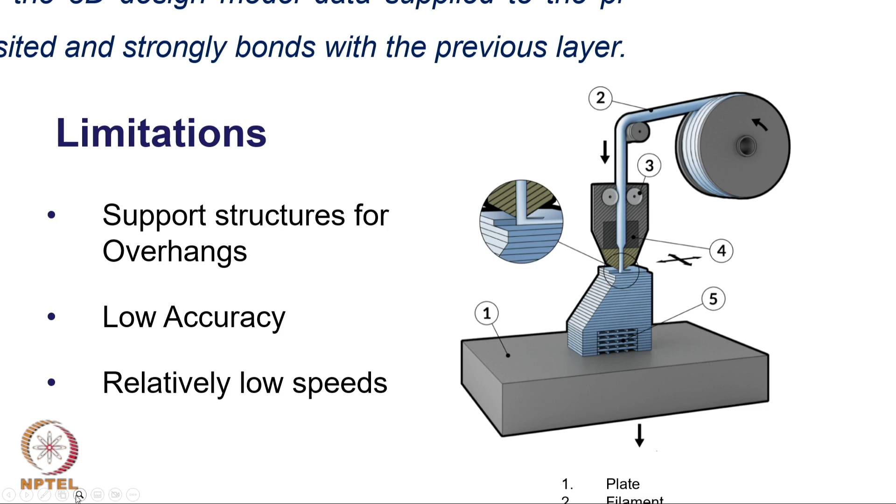The entire grey thing you see, along with a bit of green, is called the extruder or nozzle. The filament comes from the spool past the rollers, and what you see here is the heating element. When the filament passes through this heated element, it melts, and the melted material is then deposited in 2D layers like you see here.

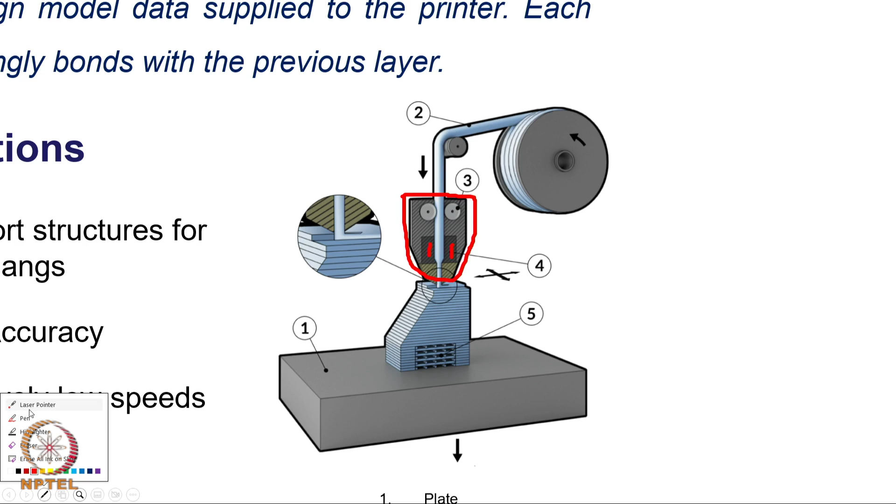In FFF technology also, you have to remember that support structures are required, just like in other processes. There is one variation possible in FFF: if you are printing a part, you can try to make the inside hollow with a certain infill - that is also possible.

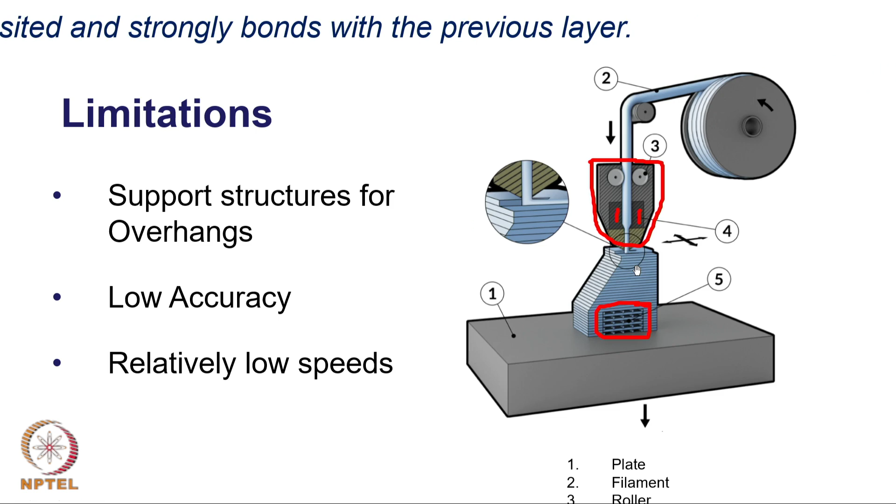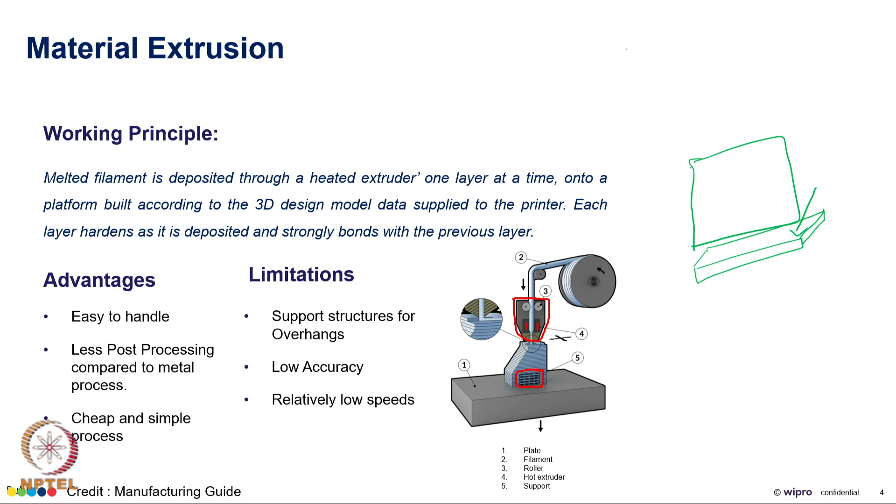For example, let me choose another color. Let's say this is the region I want to melt - this is the top view. When I see it from the front, it is a layer like this, and in isometric, this is how it will look. If I look from the top, I see a rectangle - this is the region where I want to deposit material. Now I have the option here to deposit material, let me use another color.

Give me a second, I do not think that is a good color.

So, I have the option to go from one end to another very close to each other and deposit material, making the entire thing completely solid because the lines are very close together. But if I want to save material and make the process faster, I can deposit the material with some gap in between, like this.

This region is called infill. In material extrusion, we have the option of keeping the part hollow on the inside. Infill percentage can be 30%, 10%, 80%, depending on what we want to achieve, so the infill can be hollow. However, the boundary of the part has to be completely solid. There is no compromise on the boundary being solid, only the inside can be hollow, and this is called infill.

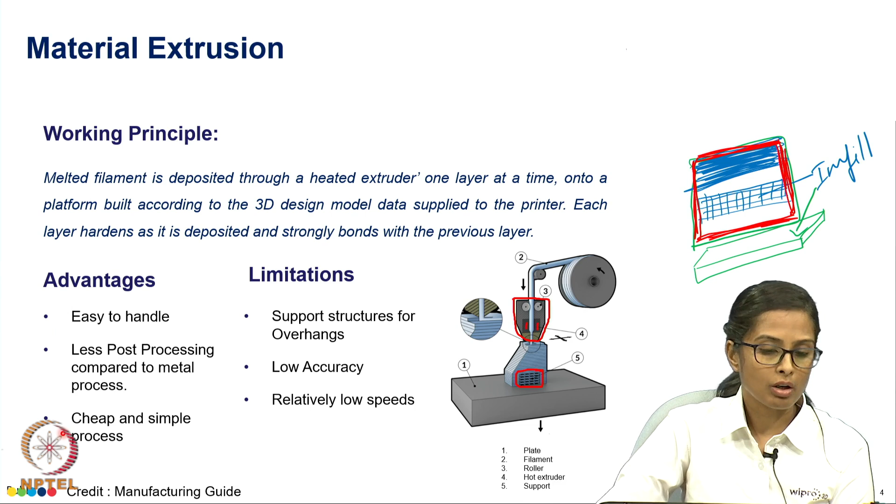This is a technology which is extremely easy to handle. It is also a very cheap and simple process. It is possible to procure these printers easily from the market at quite a low cost, and it is very simple and easy to handle. With very few directions you can start to use this particular printer.

Another advantage is that a lot of different materials can be processed using this technology. Polymers, of course, like thermoplastics, can be very easily processed, and you have different kinds like very high performance polymers like PEEK, PEKK, and ABS, which is a very hard and strong material. All of these can be processed using FFF technology. It is also possible to process a flexible material called TPU. So, the range of materials available is already high.

These days, if you are able to make a metal filament along with some binders, then even metal can be processed using this technology. However, we should remember that after the printing process, we will have to do debinding and sintering processes to get the final part, so there are some extra steps involved.

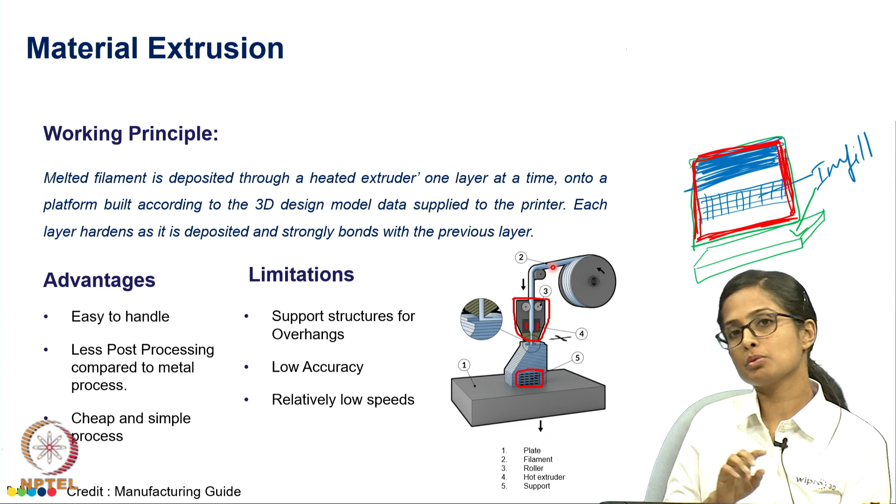FFF technology is one of the most popular technologies. You will usually see a lot of hobbyists who have this even at their homes. There are certain limitations: support structure is always a disadvantage in 3D printing, and in this process also. Low accuracy, as compared to the SLA process. Relatively low speed compared to, let's say, a DLP process. These are only relative to each other. The reason this process is not as accurate as SLA is because the layer thicknesses are higher than what we use there.

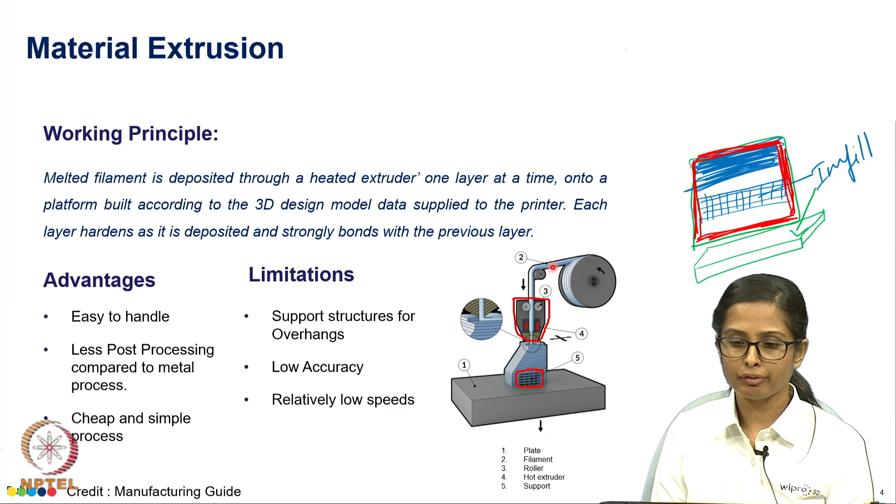I hope the working of FFF technology or material extrusion is clear from this slide. Now we will move on to discuss the different materials, which I already started to brief you on. What is listed here are some of the most used materials, but it is possible to 3D print metal, ceramic, and composites also with this technology, though slight extra processes will be involved.

Stratasys, mentioned here, actually had a patent on this technology till about 10-12 years back, and they call this technology FDM, fused deposition modeling. So it was patented by them and it is a trademark name for them. Many of you may know this technology as FDM, but probably the correct term to use for this is FFF or material extrusion.

Now the patents have expired and a lot of companies are making machines based on this technology, and Wipro also does the same.

The variety of materials processed on this machine also make it suitable for different applications. Robotic grippers are one such application, and we can use pneumatic grippers and things like that made from material extrusion.

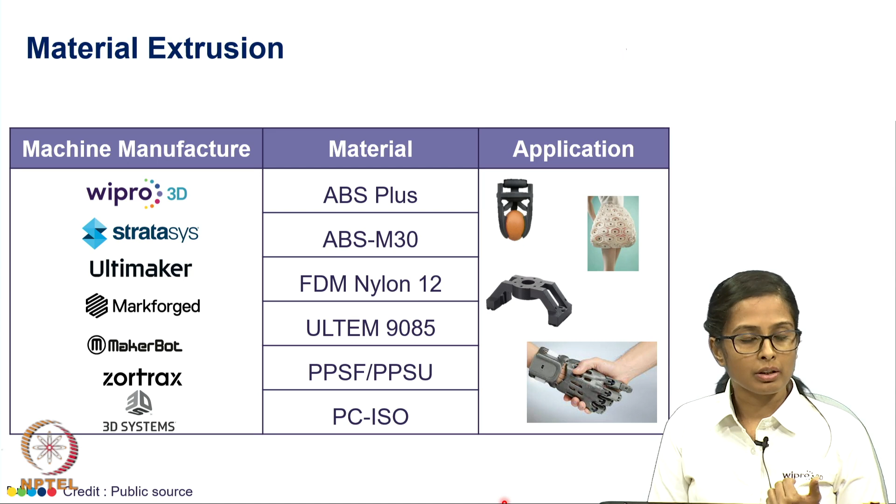I think imagination is the limit - if you think of anything, you can do it. Let us say at home you are a hobbyist and the washing machine knob is broken or something like that - you can 3D print it if you are able to design it. So the applications of FFF technology are really very, very high.

The next technology we will discuss is material jetting. When we come to material jetting, it is very similar, I would say, to our color printing, and let me explain how that works using this diagram.

We have a plate again to start with, that is a given every single time, and then we have the raw material in liquid form here - probably a polymer resin. In this case you can have two different materials: one support material and one actual part material.

This reminds me to also tell you that even in FFF technology, which we just finished discussing, the material was coming out of one nozzle, but in the machine you can put 2, 3, 4, 6, however many nozzles you want, and simultaneously print with different materials.

So maybe you are all printing with ABS only, but you can have a green color ABS, an orange color ABS material, and you can print with them. So it is possible there, it is possible here also. Instead of having two containers, you could have more than two containers over here, and hence the colors or the mixing that you can get becomes even more varied.

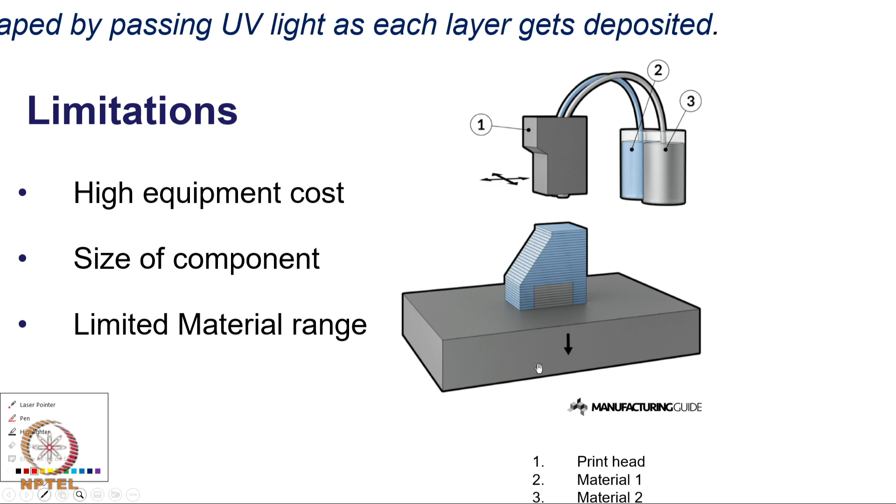So this liquid polymer over here will come through this print head. We call this the print head, just like we have in our paper printing machine, and the material is then jetted out, sprayed in a way only where it is required. So you will have very fine nozzles and material will be jetted out only where it is required. So here you could have the support material, in this technology also supports are required, and the support material can be different and the part material can be different.

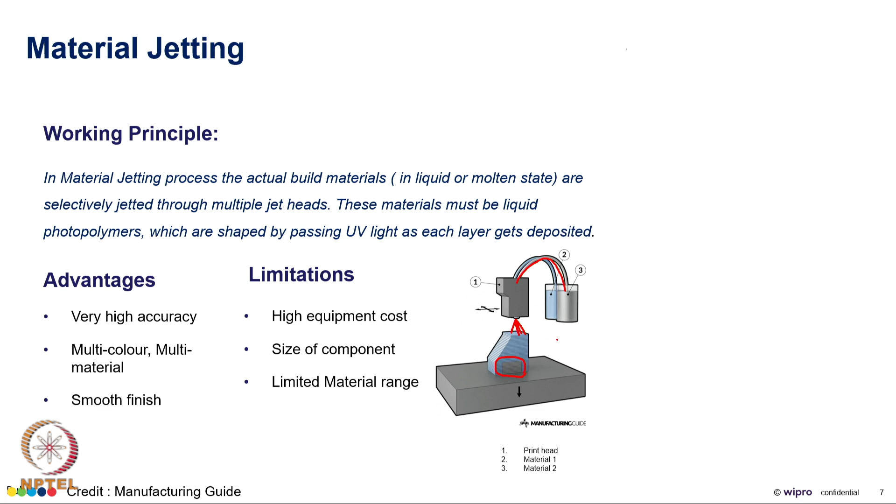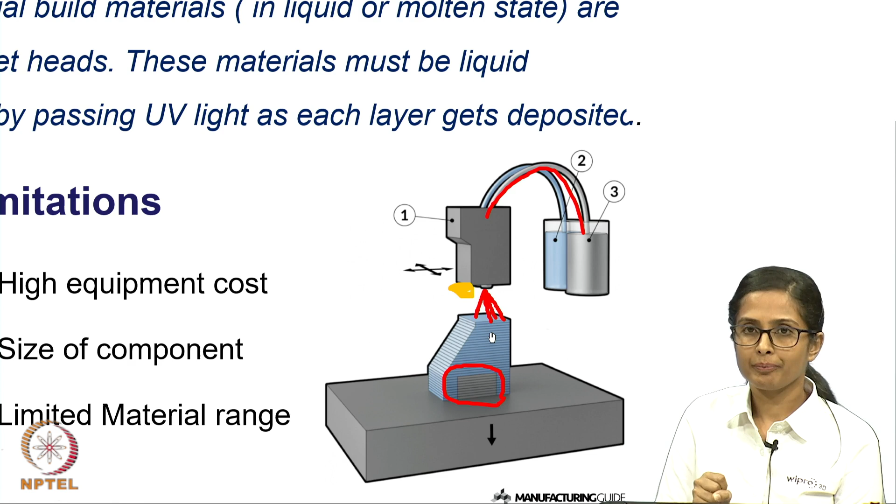Now, once the spraying is over, there is another step which needs to be done, and that would be the curing. So once the spraying is over, in the same print head it is possible to have a UV light source, and this light source will help us cure the resin which has been sprayed. So this orange color blob that I wrote, consider that as a UV light source or some light source which will cure the polymer once it is sprayed, hence the shape stays, because it has gotten cured.

So this is MJ technology, material jetting. It is also sometimes called MJT, material jetting technology. Just add a T for technology there. So that is another acronym and its expansion for you.

What are the advantages? Even here you get extremely accurate and smooth finish parts, but owing to these different containers that we have, it is possible to have multi material and multi color prints.

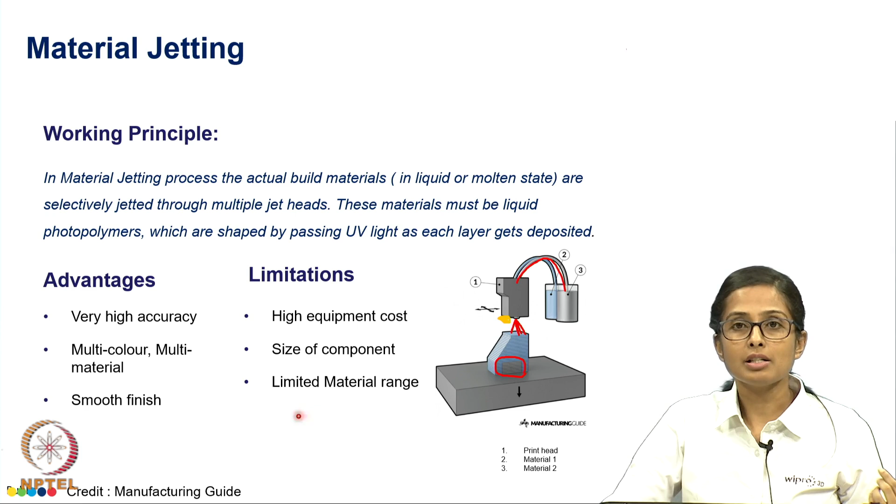However, the limitations are that the machine, the printer itself could be quite expensive. You can't make very large parts like in FFF probably, and you are limited to only those materials which are curable by that particular light wavelength and all that. Multicolor however is definitely possible.

The applications, you can make very good prototypes using this particular technology, and colorful prototypes with texture, finish, however you want. Stratasys also makes this machine, they call it polyjet technology, exactly the same working principle but a different name. So you could have different names for the same technology, and you can have like wood finish, leather finish on the part, using different materials.

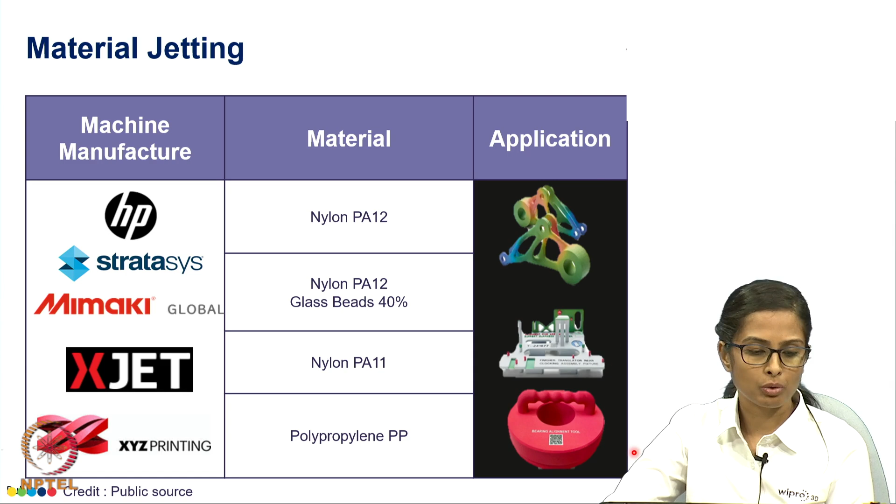Right now not many people use this as end use parts, but it is a great fit for colorful prototypes.

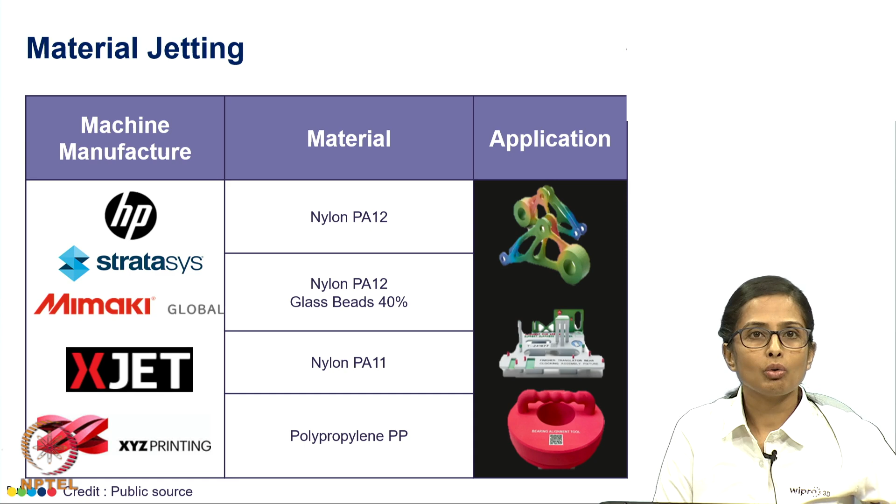Now, quickly let me move on to the binder jetting process, and this process is a little bit more complicated to understand. So I will get started with it right away and hope that I will be able to convey how the process works to you very well.

Now in this particular process, we work with powder as the raw material. The powder could be a polymer, it could be sand - yes, sand can be 3D printed as well - could be ceramic, could be metal. So material can be anything, but it should be in the powder form.

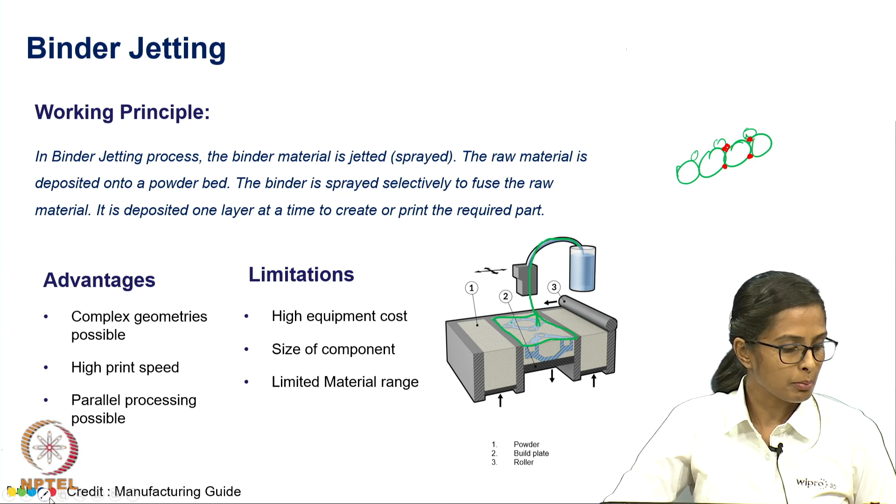So the first step over here is 3D printing it. The second step is the de-powdering.

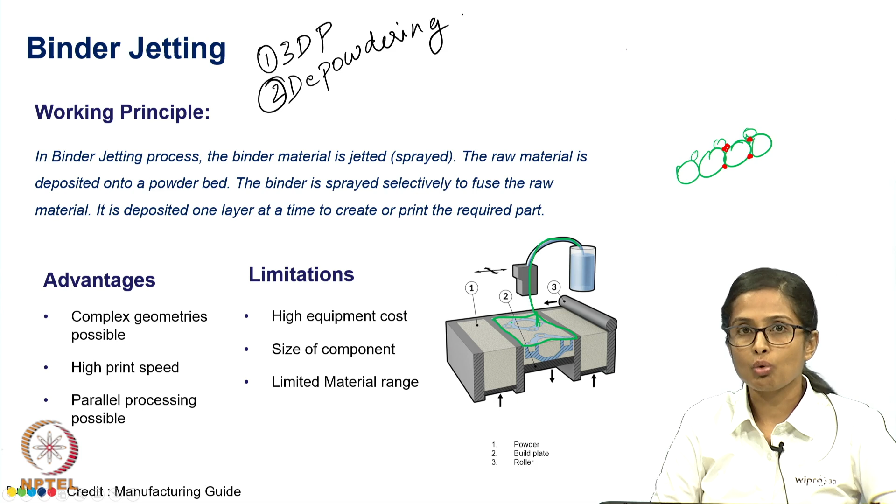Once the de-powdering is over, then we do something called de-binding. Whatever binder has been sprayed needs to be removed. Now every company which makes a machine will also give its proprietary binder.

In the de-binding step, all of the red binder that was there will evaporate, and from the green part, this part is going to become what is called a brown part.

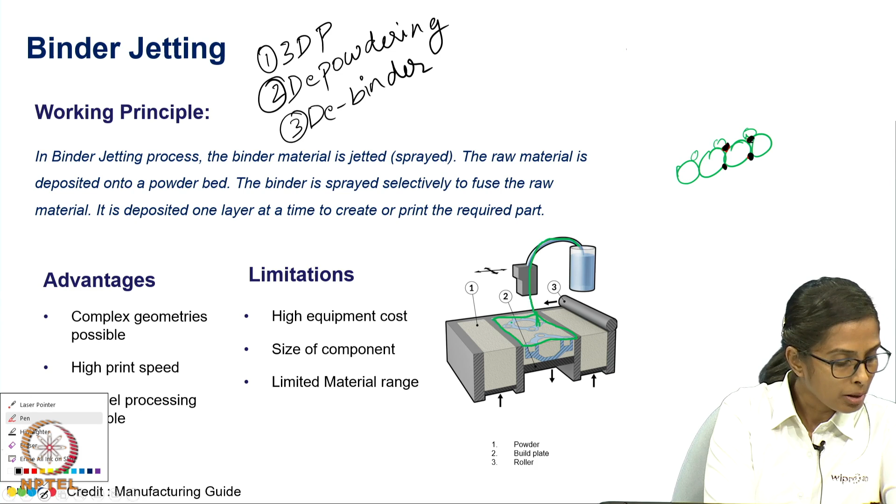So what you get from the 3D printed machine is a green part. After the binder is removed, this becomes a brown part. It has a little better strength, but still not completely solid.

So after debinding is over, that is the binder has been removed, then what we do is the sintering cycle or the sintering process, very similar to powder metallurgy.

What we will do is put this particular part inside a furnace and heat it so that it will melt and solidify. In this process the powders will melt and become a solid part in the sintering process.

In the sintering process, let us say it is the same part getting sintered, then overhangs may require supports. In such a case, supports may be required.

So this is the binder jetting process. In the 3D printing process itself, you are only spraying the powder binder, so there is no heat, the powder is not solidified. You do not require supports during printing, but during the sintering cycle you may or may not require them.

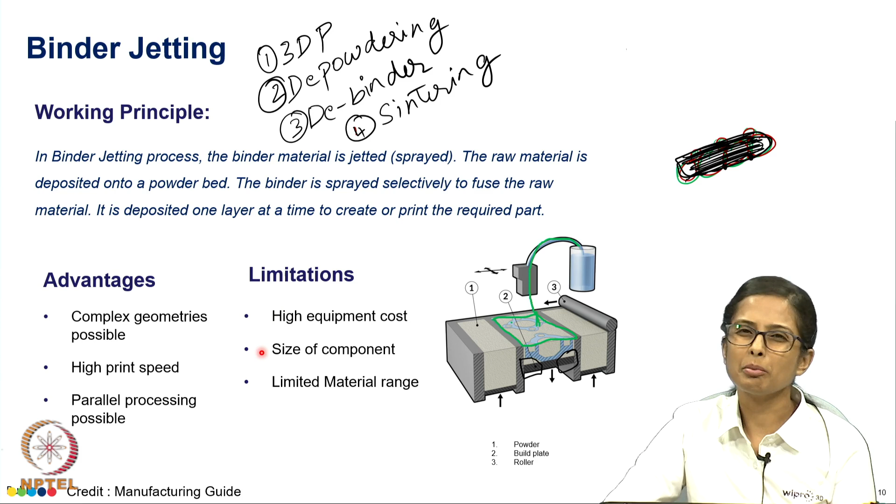However, today the equipment cost is quite high. We are not able to make extremely big parts, because in this process the shrinkage can be as high as 20 to 30%. So we have to make the part larger, print it, sinter it, and then bring it to size. So the size of the component is right now a limitation.

Limited material range, in the sense, not sand and those kind of things, but like in metal only, the process is right now proven only for, let us say, steel and titanium or maybe a few other things. It is not proven for all the materials right now.

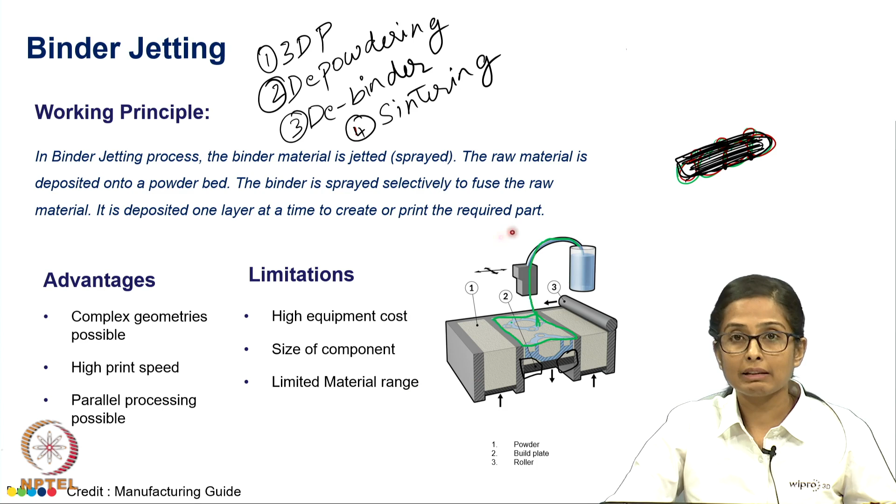You need a lot of ancillary equipment. Other than buying the 3D printer, you have to buy the furnace, the debinding station, and all of that. So those are some of the disadvantages.